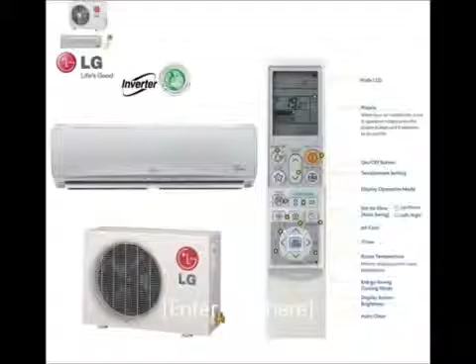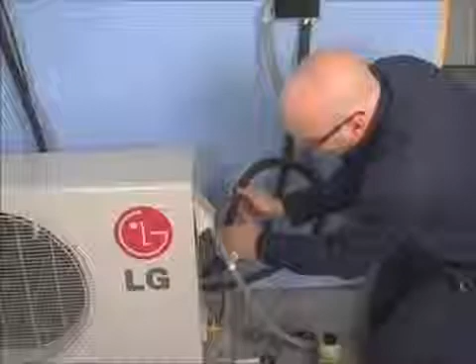Welcome to LG Electronics single-split air conditioning installation procedures. Installing the system right the first time ensures great performance and long life from the very start. Let's begin with tools and materials needed to successfully install an LG ductless split air conditioner.

You'll need the following equipment: digital multimeter, micron gauge, vacuum pump, digital charging scale, EPA-approved recovery equipment rated for R410A, manifold gauge set approved for R410A use, refrigerant leak detector, nitrogen tank and regulator.

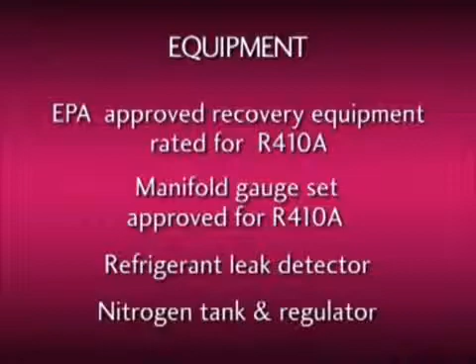And the tools you will need include a number 2 Phillips screwdriver, a 5/16 R410A access port adapter, a 4mm hex wrench, flaring tools, refrigerant tubing bender, a bubble type level, tape measure, open-end torque wrench set for tightening flare nuts, core drill and bit capable of boring a 2 3/4 inch hole. Now we're ready to begin the installation process.

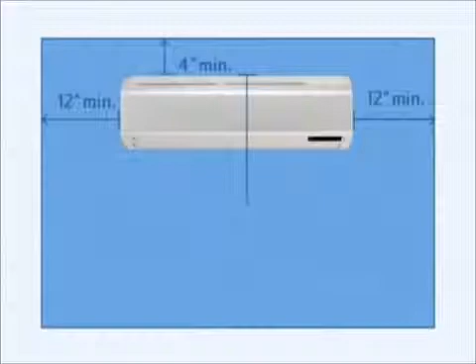Take a survey of potential installation locations on the job site. Placement of the condensing unit must be within the model-specific limits. The clearance for the indoor evaporator should be a minimum of 12 inches on either side, no less than 4 inches from the ceiling, and 7.5 feet from the floor. The clearance of the outdoor condensing unit must be no less than 4 inches from the back and left sides, 24 inches from the right side, and 28 inches from the front of the unit.

Now it's time to unpack and inspect the equipment. The indoor and outdoor units come in separate cartons. Make sure the model numbers on both the indoor and outdoor unit boxes match. Remove the indoor unit from its container and packing. As you do this, check the unit for any damage. Locate the packet of installation instructions and review the installation steps before proceeding further. Take your time. It will pay off in the long run.

Remove the wall bracket from the back of the unit and set it aside. Next, remove the Phillips head screw from the plastic tubing retainer and remove the retainer from the rear of the unit. After making sure there's no damage, set the indoor unit aside.

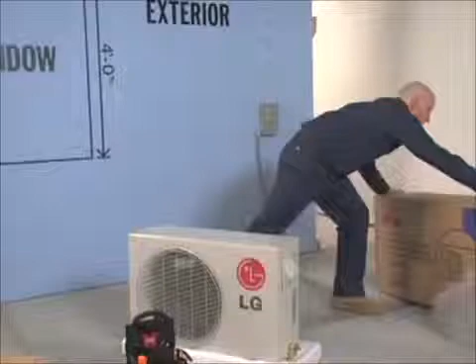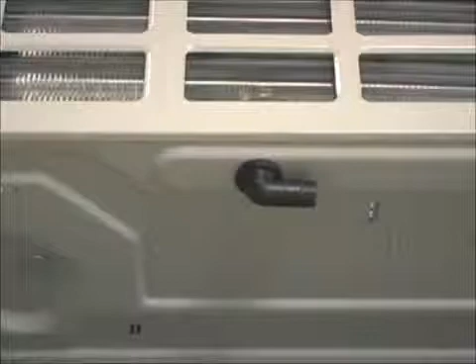After unboxing the condensing unit, set the rubber mounts aside and locate the 90-degree defrost drain adapter. The adapter must be installed on heat pump models when the unit will be mounted on a wall bracket. This will allow for a 5/8 drain hose to be attached. Now that you've confirmed that the system is free of visible defects, you can begin installing the system.

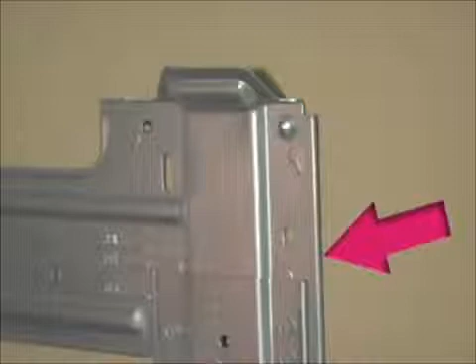Position the wall plate where the unit will be mounted. Using a level, mark off where the bracket will be mounted. Be sure to use enough wall anchors to hold the unit securely. The bracket must not bow away from the wall at the latch points of the evaporator rear chassis. Using the table in the installation manual, mark off where the wall penetration will be made. Remember to angle the penetration downward for proper condensate drainage.

Now it's time to bend the refrigerant lines. Exercise care in bending the tubing. If you're doing a surface mount, use one of the 3 knockouts. A coil spring bending aid is installed on the suction line at the bend to assist you in making this adjustment. Position the black drainage plug on the side that will not be used for drainage. Using needle nose pliers, spread the clamp and attach the drainage tubing.

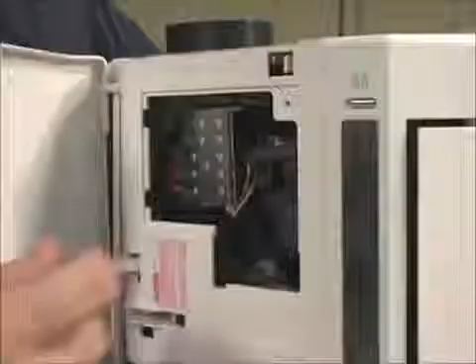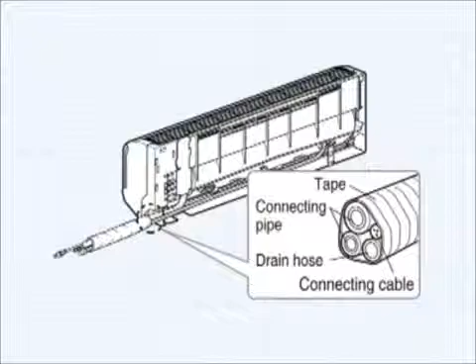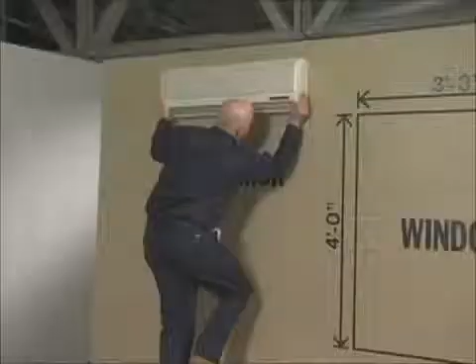The 18-4 conductor communication cable should be fed through the wall penetration and looped inside the indoor unit for connection later. Bundling the refrigerant lines, communication wire, and drainage tube will help make insertion through the wall easier. Bundle the drain line below the other lines. Proper drainage is dependent on gravity. Take care in guiding the refrigerant and drain lines through the wall penetration. It's always better to have flare connections away from the back of the indoor unit for easier connection and leak detection.

Let's head outside to install the condensing unit. The condensing unit can be mounted in one of 3 ways. It can be pad mounted, bracket mounted, or rooftop mounted. For the purpose of this video, we will focus on a pad installation. Position the pad outdoors. Install the rubber grommets on each of the 4 feet of the outdoor unit and anchor the unit to the pad.

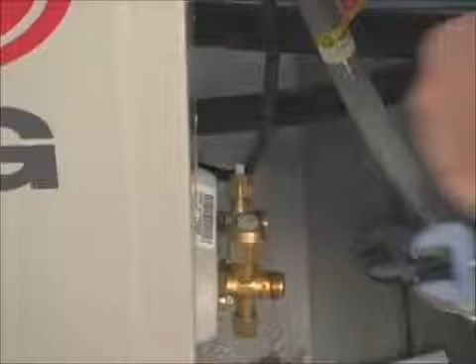Now you can remove the flare nuts from the service valves. These may be discarded if you plan to use prefabricated line sets. Otherwise, these nuts can be flared onto the lines that will be connected to the system.

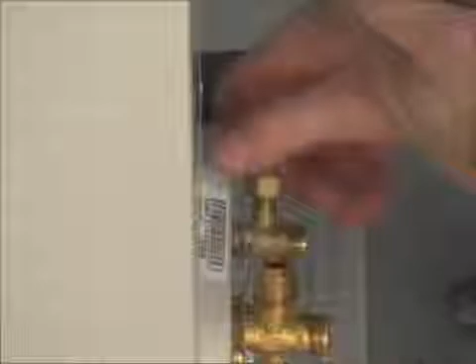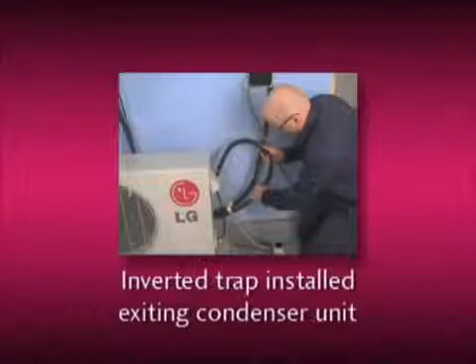Before you cut, the tubing configuration must be considered for proper oil return to the compressor. Remember the following points. An inverted trap must be installed directly exiting the service valves of the condensing unit. An oil trap must be formed in the refrigerant lines every 16 feet of vertical pipe run. Once the tubing has been cut, deburr the end and position the tubing to prevent filings from entering the tubing and contaminating it. Using good quality flaring equipment is vital.

Follow the directions of the manufacturer of your particular tool. Connect the refrigerant tubing, and using a torque wrench, tighten the flare nuts to the torque specification outlined in the installation manual. Remember to use a second wrench to back up the tightening process. Connect the refrigerant lines to the unit.

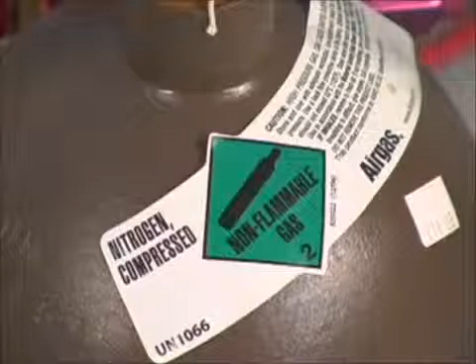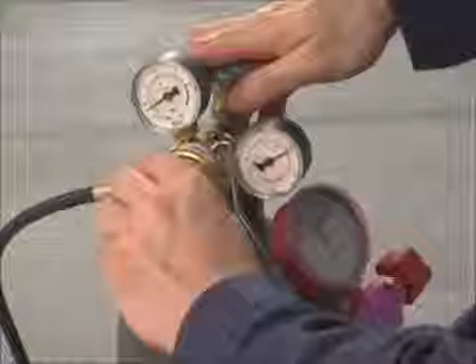Next, perform a leak check on the system. Connect a nitrogen bottle with the safety regulator to the service valves of the condensing unit. Pressurize the system to 150 psi and let it stand while the electrical connections are completed. This way you can come back to leak check after finishing the necessary wiring.

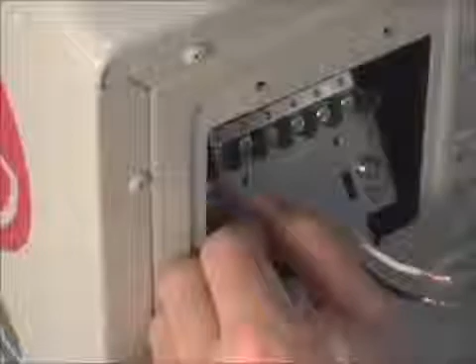Wiring the unit is quick and easy. Remove the rain-tight electrical connection cover, setting it and the screws aside. Connect the low-voltage wires in accordance with all applicable electrical codes. Move indoors to install the 4 low-voltage wires on the evaporator unit.

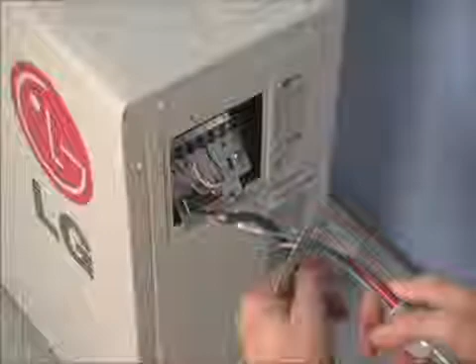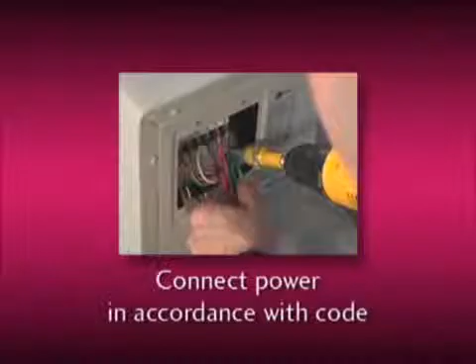Go back outside and connect the 3 high-voltage wires, making certain that the unit is properly grounded. Be sure to connect the high-voltage power supply in accordance with the local and NEC electrical codes. Leave the disconnect in the off position.

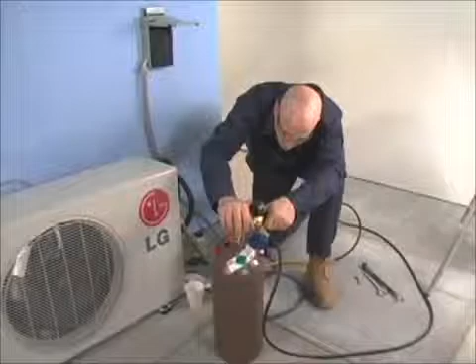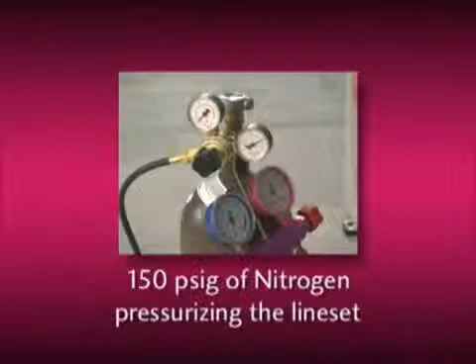Now it's time to prepare the unit for charging and system startup. Use bubble solution on flare connections to check for leaks. There should still be 150 psi of nitrogen pressurizing the line set and evaporator coil. After confirmation that the system is leak-free, the nitrogen can be purged via the service valve gauge port.

Your vacuum pump should have fresh oil in its reservoir and be capable of creating a deep vacuum. Connect the vacuum pump and micron gauge to the condensing unit through the manifold gauge set and begin evacuating the system. The pump should draw the system down to at least a 500 micron vacuum within 3 to 5 minutes. This may take longer if the system has a maximum length of pipe connected to it.

Allow the pump to operate at 500 microns or less for 30 minutes. Blank off the pump valve and observe the micron gauge. A small amount of drift can be expected. If the value does not exceed 1,000 microns after 10 minutes, evacuation is complete.

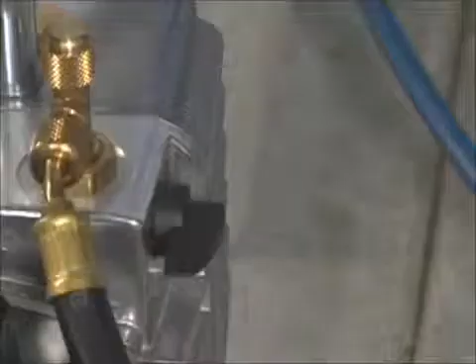If, however, the value exceeds 1,000, reopen the vacuum pump blank-off valve and run the pump for an additional 30 minutes. Observe the micron gauge again. If the micron value still exceeds 1,000, suspect a leak at one of the connections. The leak must be found and corrected before refrigerant can be introduced into the system.

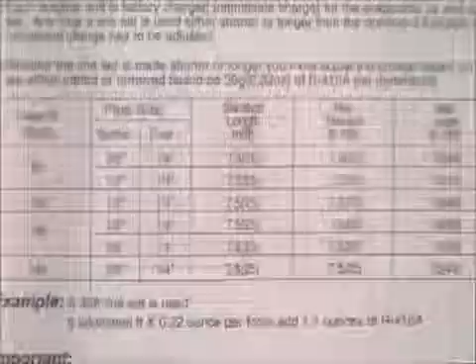The condensing unit is shipped with a refrigerant charge sufficient for 25 feet of line set. If your particular installation is more or less than 25 feet, a charge adjustment must be made. This must be handled as a critical charge adjustment. The multiplier of 0.22 ounces per foot must be applied. The amount must be added to line sets over 25 feet and subtracted from lines less than 25 feet.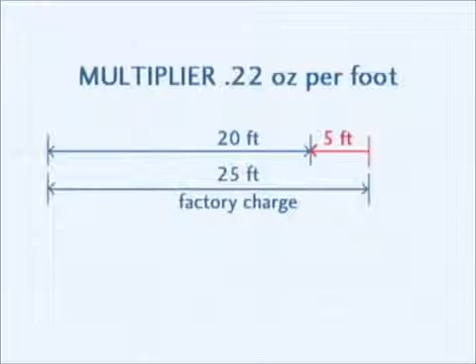The example given in the manual assumes a line set length of 30 feet. This value is 5 feet more than the factory charge, and 1.1 ounces of refrigerant should be added. But if the line set is less than 25 feet, the amount must be subtracted from the equation. In this case, 1.1 ounces of refrigerant should be reclaimed from the unit.

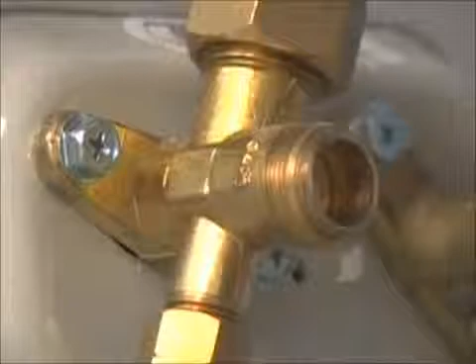To accomplish this, remove the valve caps from the service valves to access the valve stem. Front seat the back-seated valves by using a 4 mm hex wrench. Reinstall the seating valve caps to prevent refrigerant leaks. The system must now be started. Energize the outdoor disconnect. Then move indoors to turn the system on.

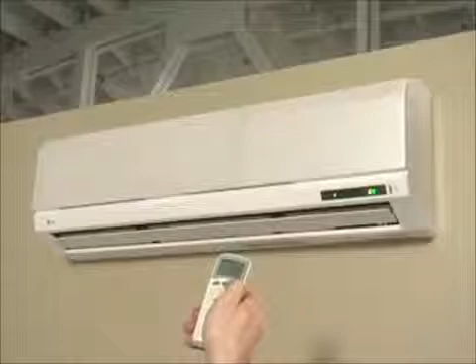Now we can finish the job by balancing the refrigerant charge. Let's finish the book example of 30 feet of line set. You can now make the 5-foot adjustment by multiplying 0.22 ounces times 5 feet, which equals 1.1 ounces of refrigerant that you must now weigh into the system.

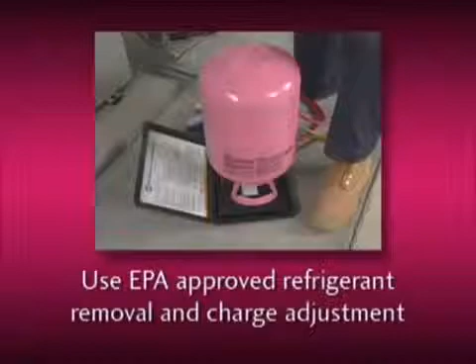R410A is a blend and must be charged in its liquid form. Also, use approved EPA practice for refrigerant removal and charge adjustment for line sets less than 25 feet in length, and while adding refrigerant for line sets longer than 25 feet.

Move to the indoor unit and use the remote control to select the cooling temperature. For heat pump units after cooling verification, select the heating mode and confirm correct heating operation, as well as the ancillary functions such as chaos and sleep modes. The unit is now ready to be put into service. Please remember to turn over the installation and owner's manuals to the customer for future reference.

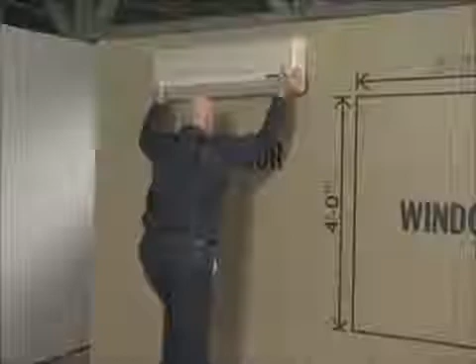Installation of single-split air conditioning systems can be done expertly and efficiently if you follow these steps. Site the installation correctly. Unpack and inspect both units. Install the interior unit according to direction. Install the exterior unit as instructed. Wire the power according to code. Check for leaks with a micron gauge. Evacuate and charge the unit with the exact amount of refrigerant. Thank you for watching and enjoy expert installations.